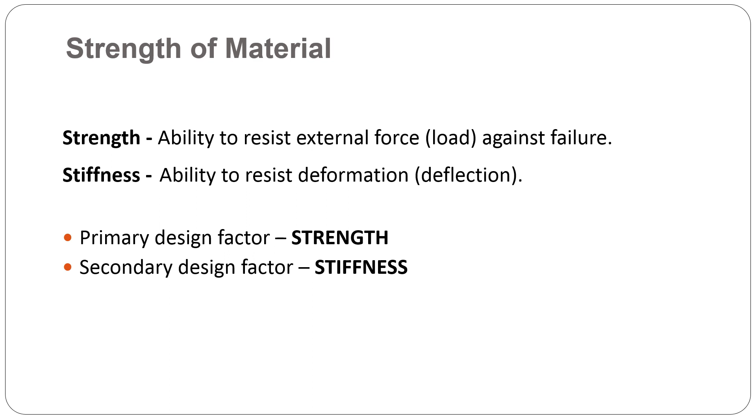Then we will see the assumptions in strength of material. While solving any SOM problem, you have to consider some assumptions. There are 5 assumptions in SOM. First assumption is material is solid and continuous. So there will be no breaking, no cracking and no voids are allowed in the material.

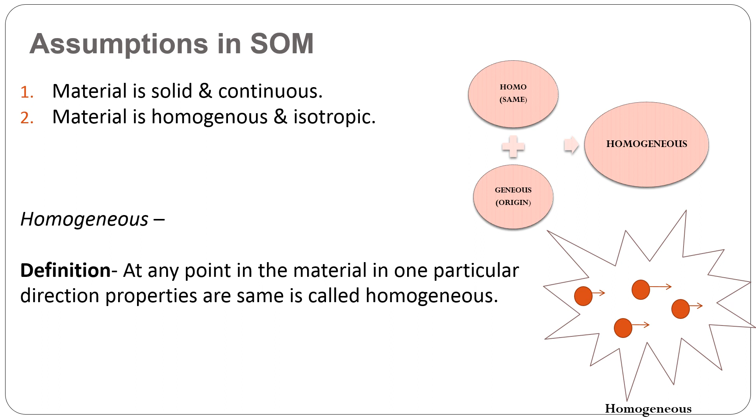Second assumption is material is homogeneous and isotropic. Homogeneous: homo means same, geneous means origin. So having the same origin, that is homogeneous. Now the figure will clear this. 4 points are there in the material. The properties are the same in one direction. So this material is a homogeneous material. At any point in the material, in one particular direction, properties are the same. That is called homogeneous.

Then isotropic. Iso means same, tropic means directional properties. So having the same directional properties, that is isotropic. Now see, these 2 points are there. On these 2 points, the properties are the same in all directions. At any point, if properties are the same in all directions, then it is called isotropic. So the second assumption is material is homogeneous and isotropic, a combination of both. The examples are iron, copper, aluminum, pure gold.

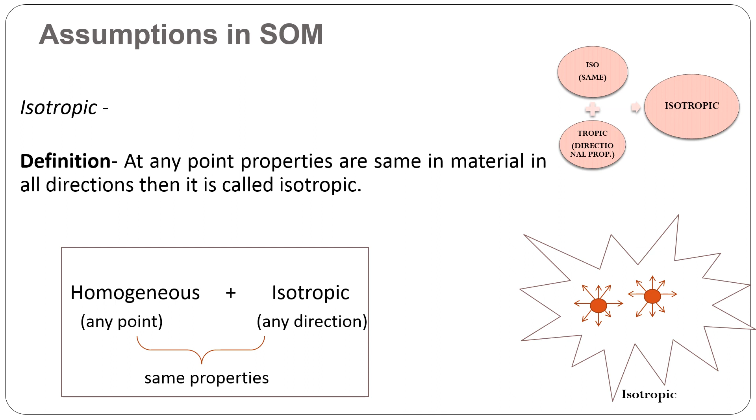Then the third assumption is self weight is ignored. If material weight is not given, consider it as negligible. Fourth assumption is superposition principle is valid. It is valid only when deformations are small compared to the dimensions of the body, and valid for linear elastic members. So these are the validity points for the superposition principle: first, valid for linear elastic members; second, deflection should be small.

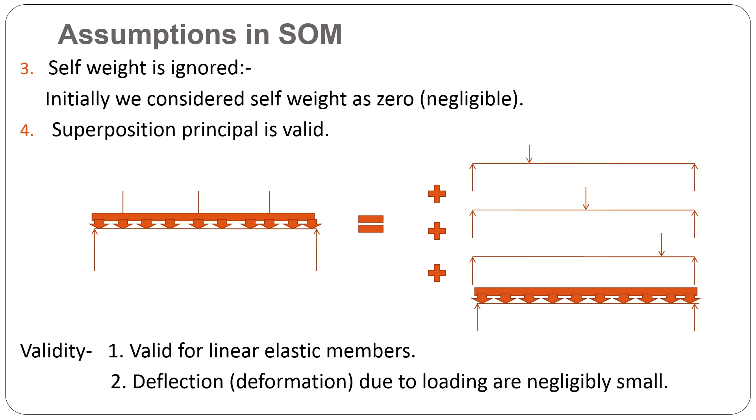Now what the superposition principle states: the summation of all the forces on the right hand side, in the first diagram one load, second diagram second load, third load, and last UDL. All this summation can be taken in one diagram, that is on the left hand side. So that is possible in strength of material. Superposition principle is valid. This is our fourth assumption.

Fifth assumption is Saint-Venant's principle is valid. Now see what Saint-Venant's principle states. Sudden change in any parameter may lead to stress concentration.

Now consider this bar. There is a sudden change in cross section of this bar, so there will be stress concentration at the corner. Due to the stress concentration, a crack may take place, so the material may fail. So this is not the correct practice to select the material.

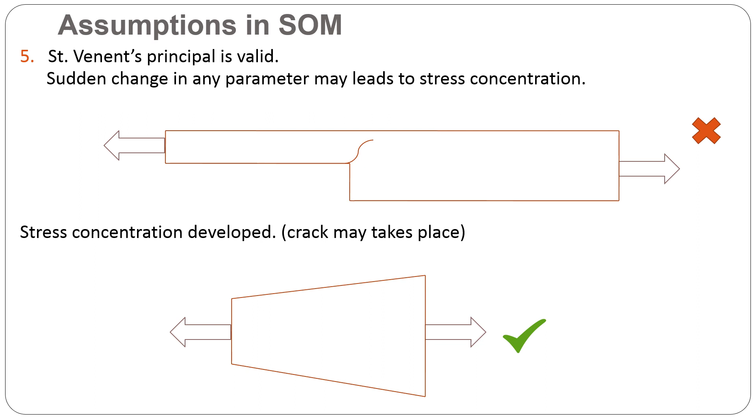So what is the correct practice to select the materials? The second figure shows the correct practice. In the cross section, there should not be any sudden change in parameter. Here the cross section changes gradually. So this is the correct practice.

One more example. Now suppose an impact load is acting on the system. Due to that impact load, our system may fail. So to avoid that, we must have some material through which the load can transmit to our system. So this is the correct method. So these are the five assumptions in SOM which are very important while solving problems.

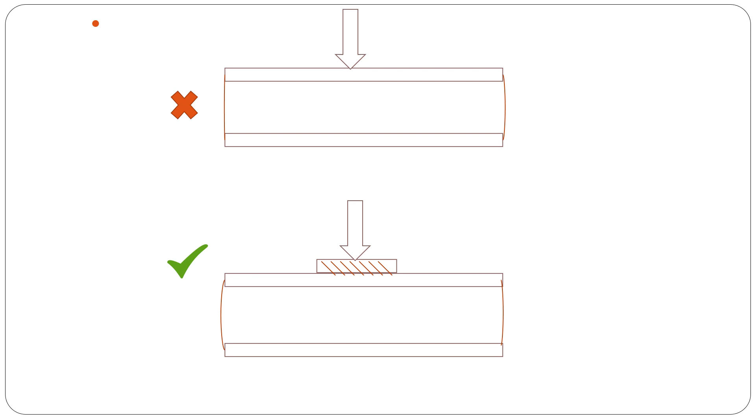Now we have to focus on fundamentals of SOM. The first thing is stress. Let's understand this by taking an example. Consider a body. External load P is applied on the body. Due to this applied load, internal forces are produced. Those internal forces are R, resistance forces. The magnitude of P and R will be the same, but the direction will be opposite.

Now what is stress? Internal resistance force per unit area is called stress. Which is the internal resistance force? R. What is the area on which the load is applied? That is A. Stress is denoted by sigma. So sigma is equal to internal resistance force R upon cross section area A. We know the magnitude of P and R will be the same, so sigma will be P upon A also. The unit of stress is Newton per meter square: Newton for load and meter square for area.

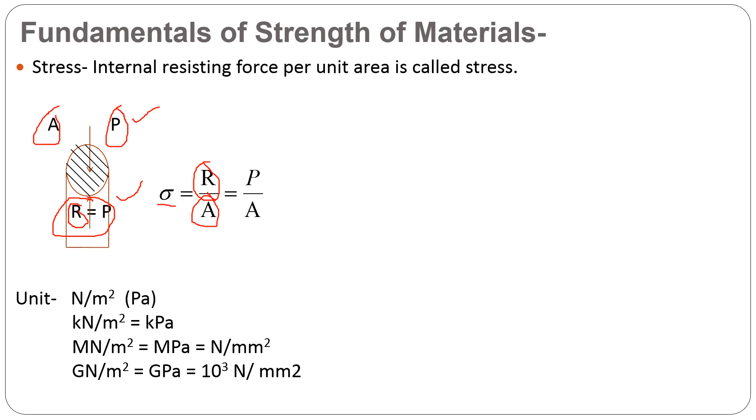These normal stresses are classified into tensile stress and compressive stress. So what is tensile stress? When a body is subjected to two equal and opposite pulls, the stress induced is tensile stress. What is the result of this tensile stress? The length will increase and the cross section area will decrease. An example of tensile stress is a tie.

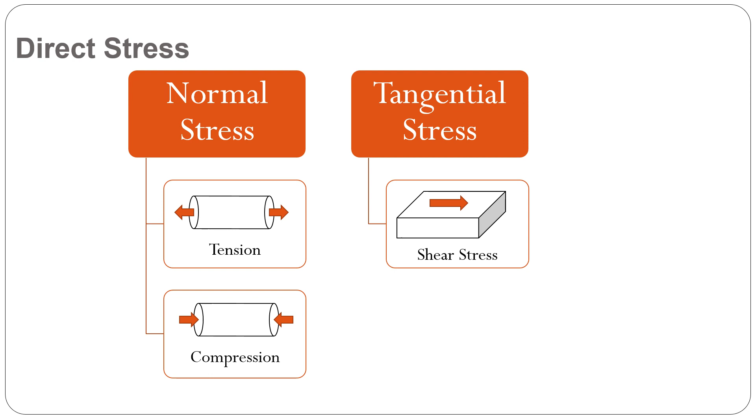Then these are indirect stresses, and these indirect stresses are dangerous stresses. First is bending stress, second is torsional stress. One important note about stress: in any material only two types of stresses are possible. First is normal stress, which is perpendicular to the surface, and second is shear stress, which is tangential to the surface. Now see, we have taken one block.

Shear stress is tangential to the surface, so this is shear stress, tau. Normal stress is perpendicular to the surface, so this is sigma, that is normal stress. Now resultant stress will be the square root of sigma squared plus tau squared. The angle between normal stress and resultant stress is called the obliquity angle. The range of this obliquity angle is 0 to 90, and it is given by tan inverse of tau by

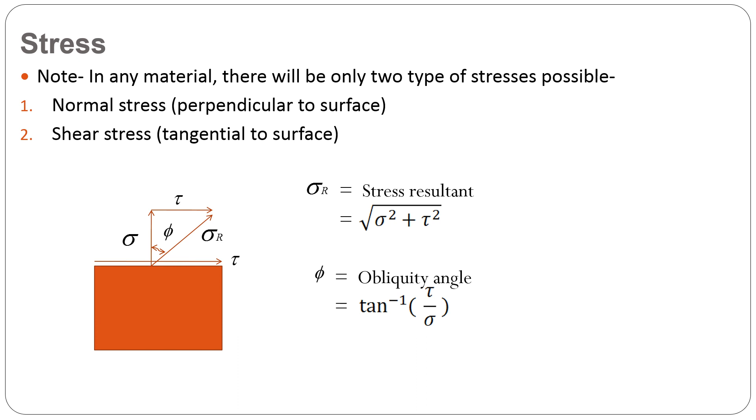sigma. So it is clear that there are only two types of stresses possible in the material: first is normal stress, second is shear stress. The second fundamental of SOM is strain. When any load is applied to a body, it will either elongate or compress, that is, there will be a change in dimension. Strain is the ratio of change in dimension to the original dimension. So strain does not have any unit; it is unitless. Strain can be classified into three: normal strain, shear strain, volumetric strain.

Normal strain we have already seen: change in any dimension upon original dimension. Then shear strain is due to shear force, a distortion in shape. The shape changes without change in volume. So that is shear strain. It is the change in angle between any two mutually perpendicular planes, represented by phi. Phi will be theta 1 plus theta 2. This phi is in radians, and a radian has no dimension, so shear strain is also dimensionless.

The third is volumetric strain. Volumetric strain is also called dilation, and it is due to normal stress, normal force. In that, the dimensions and volume change without change in shape. So volumetric strain is due to normal force. It is volumetric change upon original volume. So that is about strain.

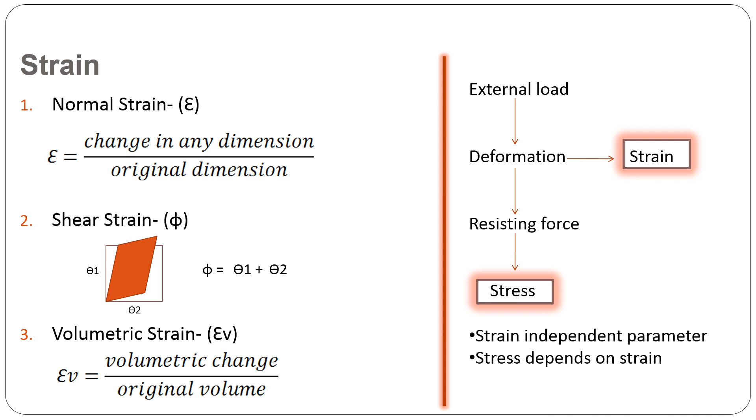Then we'll see the relation between strain and stress. When external load is applied on any member, it causes deformation. This deformation causes strain. When there is a deformation, there will be a resisting force which causes stress. So strain is the independent parameter and stress depends on strain. That is the relation between stress and strain.

Then properties of material. Some properties we require: ductility of a material, malleability of a material, which are the brittle materials, which are the plastic materials. Ductility is related to application of tension. Duct means thin wire, so we are making thin wires. Examples: soft metals are ductile, gold, copper, aluminium, iron. Usually ductile materials are strong in tension, weak in shear, and moderate in compression. Therefore ductile material will always fail in shear.

Second is malleability. In malleability, material can be made into sheets, so it is related to compression. Examples: all ductile materials are malleable materials. So this is about malleability. Then brittle material fails suddenly; there is sudden failure in brittle material. Examples are cast iron, glass, stone, concrete. Brittle materials are strong in compression and weak in tension. Therefore, brittle material always fails in tension.

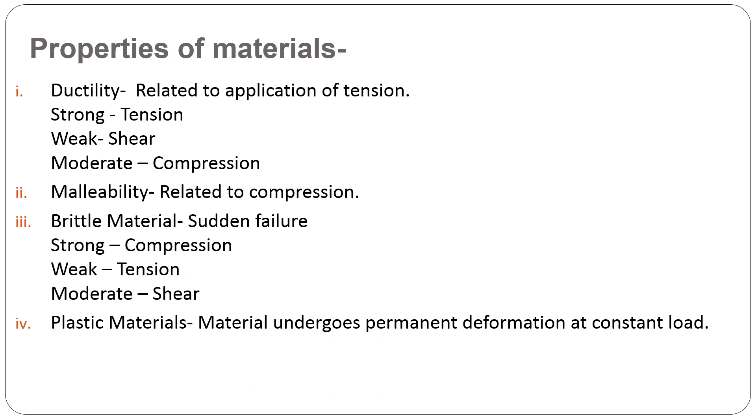In the next video lecture, we'll talk about an important topic, the stress strain curve. We will see the stress strain curve for various materials, and after that we'll see the elastic constants.